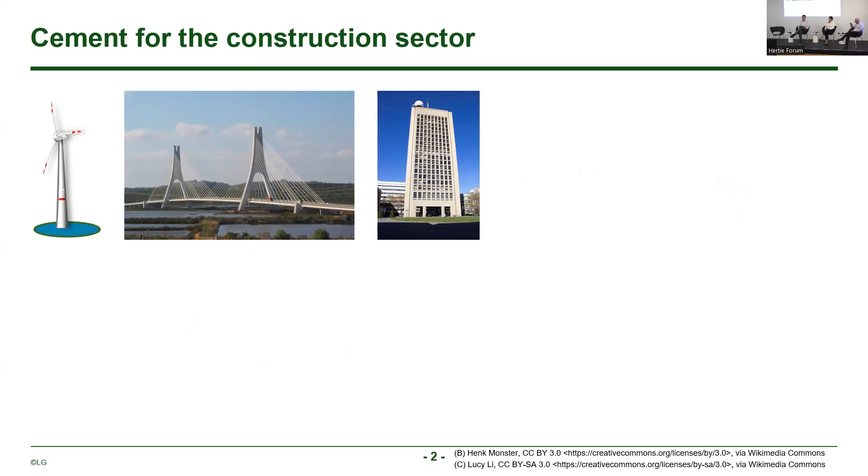So I want to give a brief overview in the topic of cement production and the different scales. All of you know what cement is being used for. Tobias gave a great introduction in the history of Portland cement. We need cement and concrete products for wind turbines, for bridges, for buildings in the future, probably also over the next decades until we achieve net zero emissions by 2045 or 2050 in Europe. And that's quite a short time scale.

It's only 25 years compared to the 200 years of process optimization, of improving cement production facilities to make them more efficient. In a very simplified way, we can say that for Portland cement, we use limestone that is then used to produce clinker. There are lots of chemical reactions going on, high temperature process, 800 to 1000 degrees Celsius. The limestone is decomposed into carbon dioxide, which is the process-related emissions, but then we also have large quantities of carbon dioxide emissions from the fuels.

And then we use clinker, usually 60 to 90% of clinker for different cement products, and cement is not only one product, but there are several dozens of different types of cements with different chemical properties, binder functions, etc. And we'll probably hear more about those different variety of cement products later on. And then we can also use lots of supplementary cementitious materials, so other materials which, for example, blast furnace slag, have similar properties and can be used as a clinker substitute.

If we look at cement demand in Europe today, we are at around 183 million tons demanded and used every year, of which about 77% are provided with clinker.

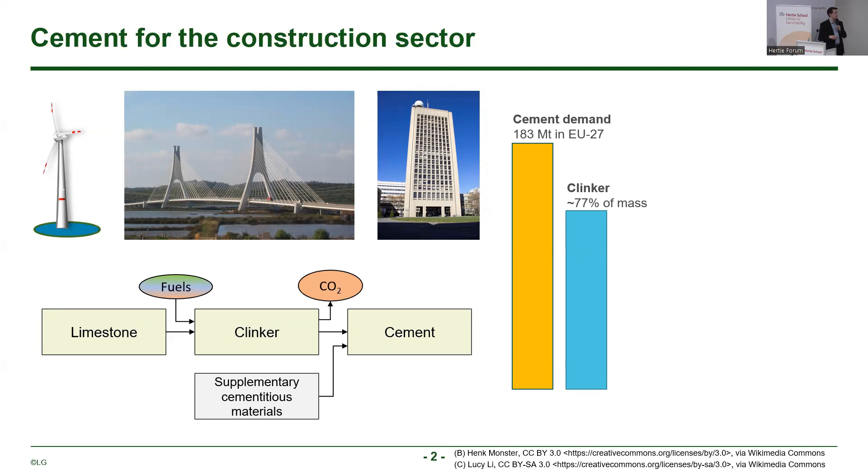If you look at the greenhouse gas emissions from clinker production, we have the process-related carbon dioxide emissions from the chemical reactions, up to 480 kilograms per ton of clinker. And then we have, on top of that, roughly the same amount, about up to 400 kilograms of carbon dioxide per ton of clinker of the fuel-related carbon dioxide emissions.

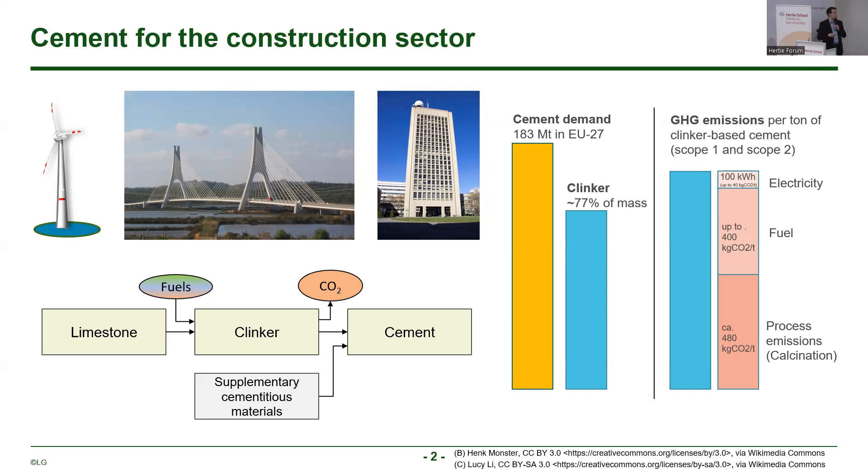Of course, there are large differences across production sites, can be any number between 200 and slightly more than 450 kilograms, depending on the fuel being used, on the process efficiency and the operating efficiency of the cement plant or the clinker plant. And then we have electricity, which is needed for the different grinding processes and for operating the production sites. I want to talk about these opportunities for reducing these emissions, give a brief overview of the production. But let us look at cement production globally.

200 years ago, there were probably only a few kilograms of Portland cement being produced every day. Then it increased to tons. If we look over the past decades of cement production, over the past 30 years since 1990, cement production has more than tripled. It's a similar order of magnitude as other bulk materials like steel and aluminium.

Production has now stabilized at around 4,200 million tons every year. But given the increasing demand for infrastructure in countries all over the world, demand is expected to be as high as it was previously. This is really a striking and important number to keep in mind, that the production volumes are really of large quantity.

If you look at global in-use stocks today, that's part of an analysis we did last year and published, so you can also read the details of the analysis and the approach. We looked at different cement in-use stocks in different countries using the World Bank country classification of high, upper middle, lower middle, and low income countries. We have one representative example from each group.

We see that the in-use stocks in terms of cement in-use stock per capita can range between 10 and more than 30 tons per capita in high-income countries, and can be as low as 1 to 7 tons per capita for lower-income countries. As we see countries building infrastructure, roads, wind turbines, and all other forms and buildings that need concrete and cement, we probably expect an increase in the production.

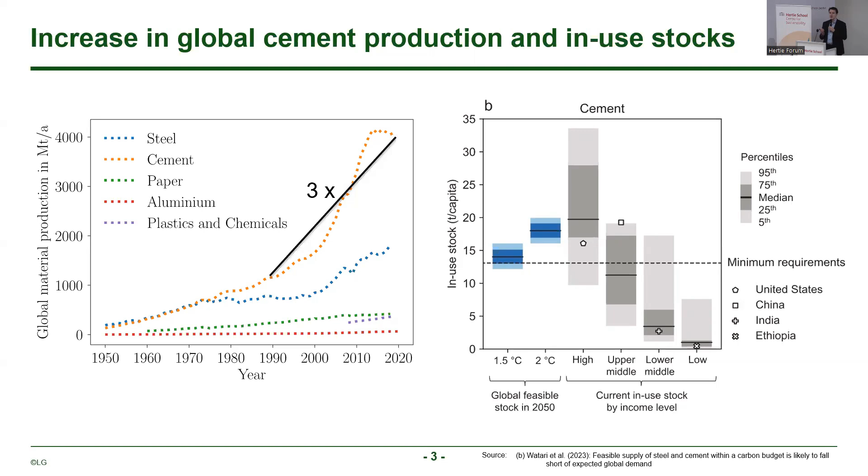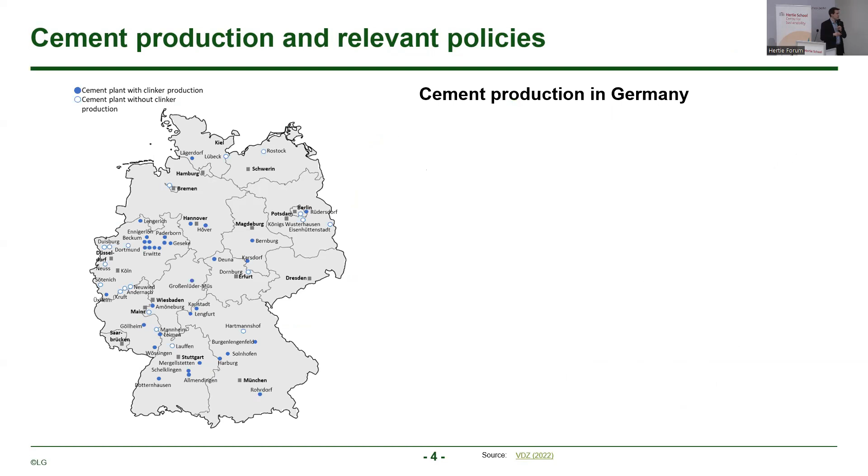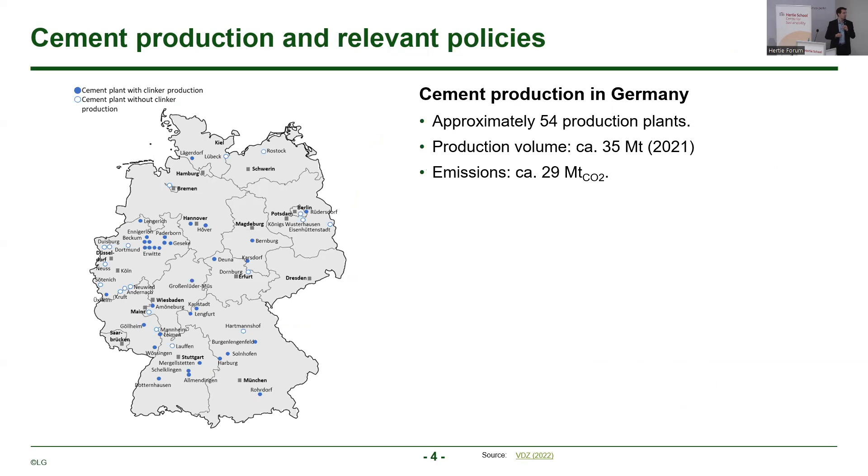If we look at cement production in Germany, this is a map, and there are lots of statistics available from the VDZ. We have approximately 54 different production plants, some integrated production sites with clinker production, but then also cement grinding facilities. The production volume is around 35 million tons. If you compare those 35 to the 4,200, you see it's quite a significant delta. The emissions are around 29 million tons of carbon dioxide emissions every year.

There are many different policies that are currently being discussed at local, federal, European level. We heard some examples of the carbon contracts for difference earlier on today. There are also examples of hydrogen use in cement production, but there are also other international trade mechanisms like the carbon border adjustment mechanism, then the national carbon management strategy, which highlights or classifies cement and waste incineration as some of the hard-to-abate production processes.

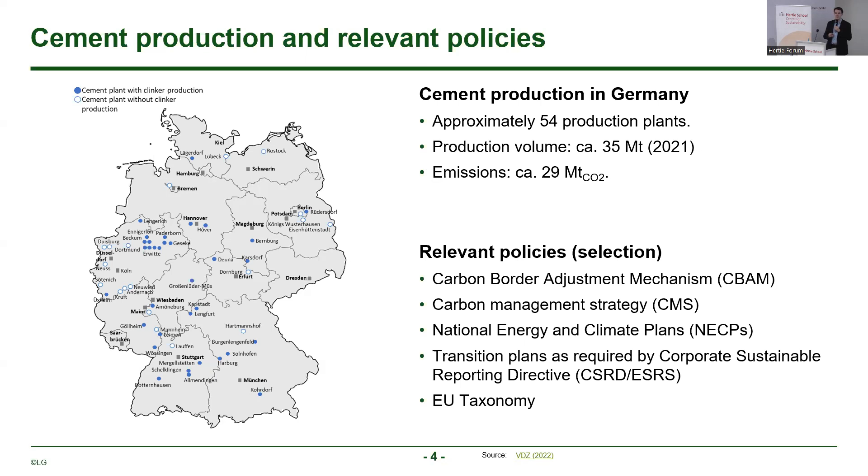I'm sure that's something we can discuss later on as well. Then there are the national energy and climate plans, which outline the national strategies to achieve the different European emission targets over the next decades, which also only include a few words and paragraphs on industrial processes and cement production. And then there's, of course, the different reporting requirements as part of the European Corporate Sustainability Reporting Directive and the European EU taxonomy, which provides a financial framework for classifying investments into cement facilities as environmentally sustainable.

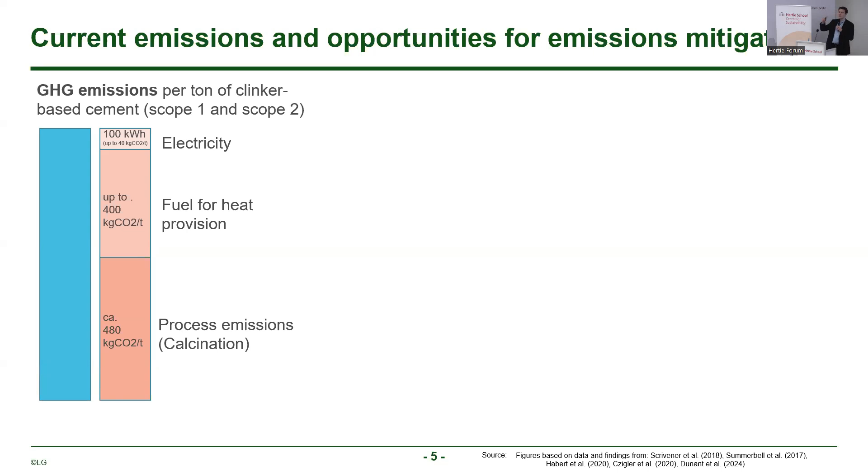If you look at the emissions figure again, we have the greenhouse gas emissions per ton of clinker-based cement, roughly in that order of magnitude. So it's around 1 ton of carbon dioxide emissions per ton of cement today, and we want to get this to net zero within the next 20 years.

For electricity, we know we can use renewable electricity, and by multiplying the 100 kilowatt hours needed per ton of clinker-based cement with a quantity of cement, we end up at around 16 to 20 terawatt hours of renewable electricity to provide green cement for Germany, which is an order of magnitude of Croatia's electricity demand.

We can use biomass and carbon capture and storage to mitigate the emissions from process or fuel-related emissions, and use CCS for the process-related emissions. The key challenge here, however, is to provide the infrastructure needed for carbon capture and storage, and to have sufficient amounts of renewable and sustainable biomass. This is a really big challenge.

There are also other options that are being discussed and have been discussed for the past 20 years or so. There's a really interesting IEA technology roadmap from 2010, which already outlines the different strategies ranging from energy efficiency, so optimizing the combustion processes and thermal insulation and other measures, reducing the clinker factor, so replacing clinker with fly ash, blast furnace slag, or other materials with similar properties.

But there are also novel innovations, and that's what we want to focus on in today's discussion, that might lead to zero emission cement. One recent innovation was recently published in a Nature paper by Cyrille Dunant and his colleagues, about cement recycling - recycling cement as a real industrial symbiosis together with steel electric arc furnace recycling.

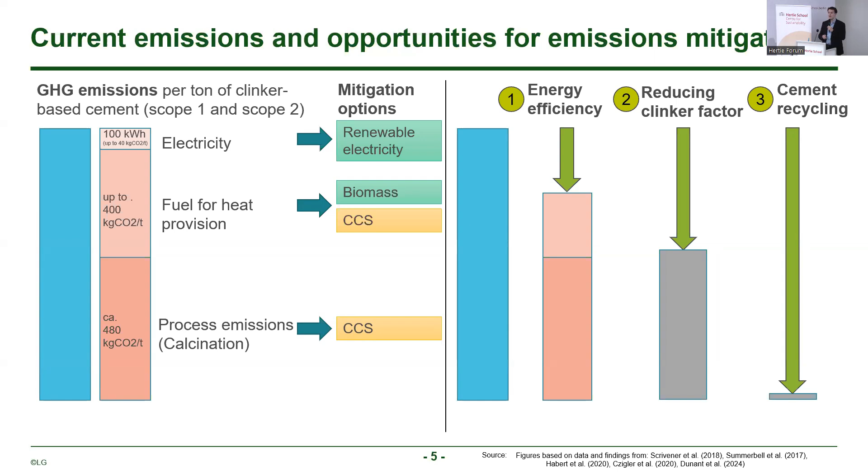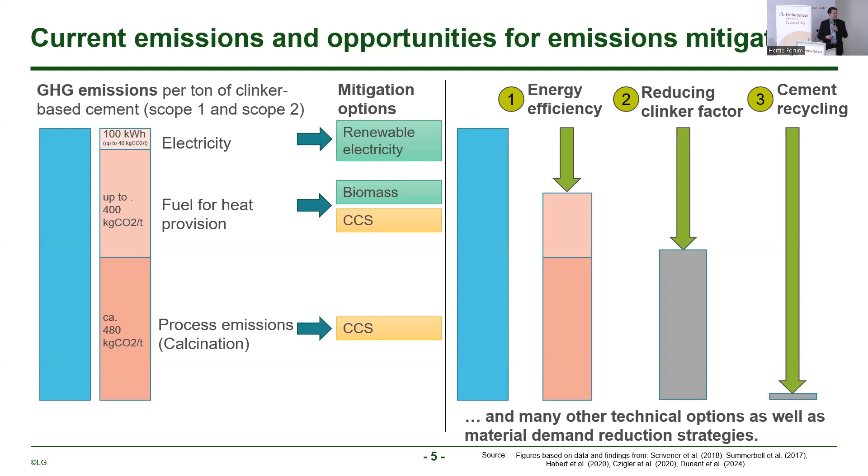Which is an electricity-based process. Of course, there are many other options for reducing the specific process-related emissions, using chemical reactions and processes as part of a carbon capture and utilization reaction to permanently or temporarily store the carbon dioxide emissions. All of these innovations might help contribute to that new mix of low carbon and sustainable cement solutions.

I want to point out one real challenge, one aspect I want to bring to this discussion, about the carbon capture and transport infrastructure. As part of an analysis, we looked at the carbon capture and storage deployment and the expected deployment in the different IEA technology roadmaps over the past decades.

We mapped the projected carbon capture for the year 2021 from the different IEA technology roadmaps, from 2010 up to the most recent one. As you see, it follows some sort of hockey stick, but unfortunately not in the direction we want to see, because infrastructure deployment for CCS has really been far below expectations.

This is due to multiple reasons. The economics of carbon capture and storage did not work out. There were social protests, concerns and objections against carbon capture, et cetera. In the end, we ended up with a current capacity for both combined steel and cement production of only 1 megaton of carbon dioxide, which is significantly lower than the several gigatons those processes emit currently.

So the key challenge now in the future is to accelerate this. There are two key observations. One is that the deployment of CCS or CCUS has been slower than expected, and that in order to meet the 2050 targets - around 2,000 megatons or 2 gigatons, roughly half of the emissions in those two sectors - by CCS, we need a significantly exponential deployment increase in those technologies.

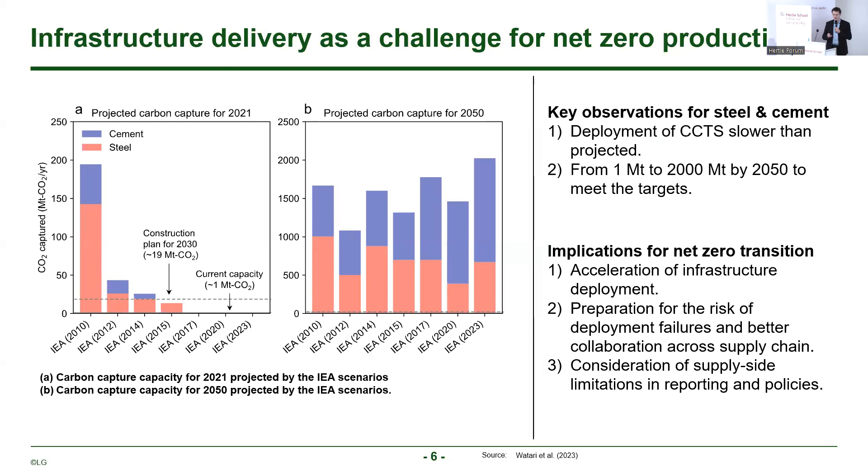What happens if there's limited supply of renewable electricity or biomass? And what are the mitigation strategies at a corporate level, but also on a national level, to address this potential risk? So to sum up, there are 5 points and 5 key takeaways that I want to summarize.

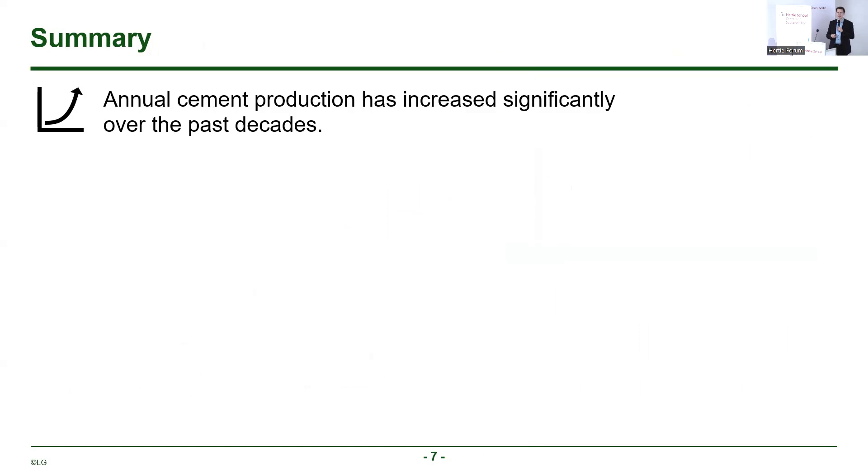First, annual cement production has increased significantly over the past decades, and we need to really find solutions to achieve net zero in cement production quite quickly, on a quite short time scale. Emissions from cement production will likely exceed, with current trends, if we don't find appropriate mitigation strategies, the 1.5 or 2 degree carbon budgets.

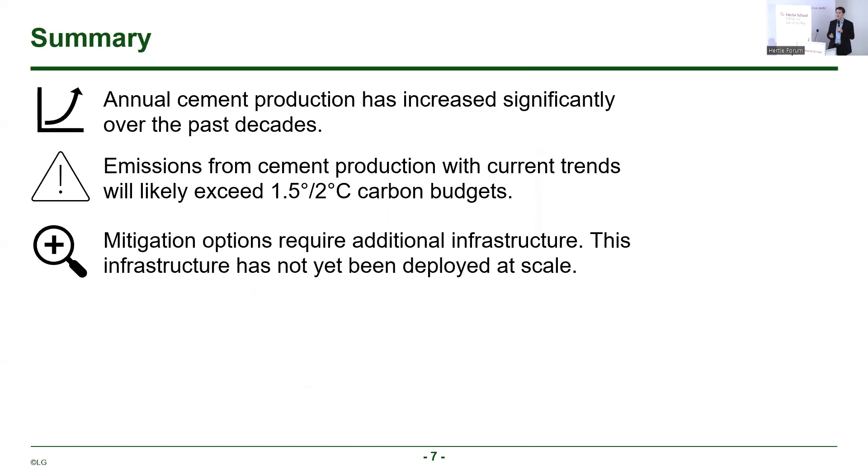Mitigation options require additional infrastructure, and this infrastructure has not yet been deployed at scale. There are, of course, pilot plants and trials available, and that's why I'm optimistic that we might achieve the challenge of net zero cement by 2050, but it's a tough challenge.

The fourth point is that significant efforts are needed to increase the supply of zero emission resources - renewables, electricity, biomass, and other mitigation options. And the final point is that there are innovations that exist to reduce emissions with efficiency increases, novel production routes, and novel processes that we might not know about today, but that might come into the market over the next five years or so. Thank you very much, and I look forward to the discussion and especially your questions.

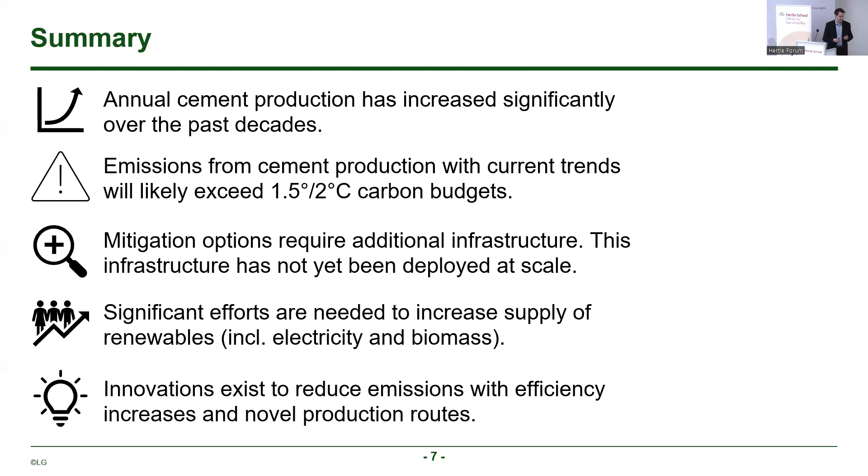How are we going to do this? So we're supposed to react. And let me start with a few reactions, or actually more questions towards you.

I thought this was a really good introduction, a good overview on what we're trying to achieve here. You lined out a lot of areas where we need more attention, more policy push, innovation push, and so forth. Specifically, if you look at the next 2, 3, 5 years ahead, or think of a legislative cycle at the European Union, what do you think would be the immediate next steps we need to take to advance on those?

Well, that's a tough question, because there are so many various levers that you can pull.

From the demand side, there are different options for changing public procurement practices to ask for higher shares of low carbon cement products, so low clinker based cement, and those technologies already exist today. If you go to any cement producer and ask specifically for more sustainable or low carbon cement alternatives, they might offer them. Of course, there is a certain cost premium, and if this sustainability premium is reflected in the design of those procurement mechanisms, I think this would create immediate market pull for more sustainable, or at least slightly lower carbon, cement products. Of course, they're still far away from net zero cement.

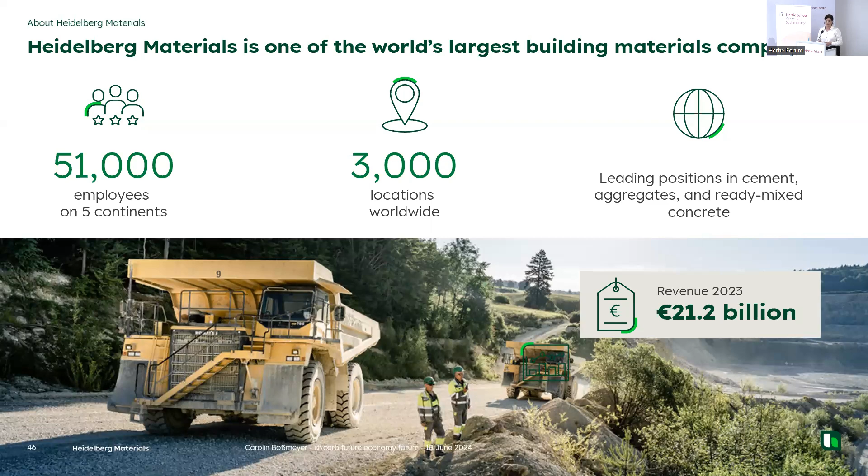As was mentioned before, concrete is indeed indispensable for fulfilling the construction tasks of the future. It is the second most used material in the world after water, because of its good properties and range of applications. It comes with a number of advantages — it's extremely versatile, locally produced and sold, recyclable 100%, durable, sound absorbent, etc.

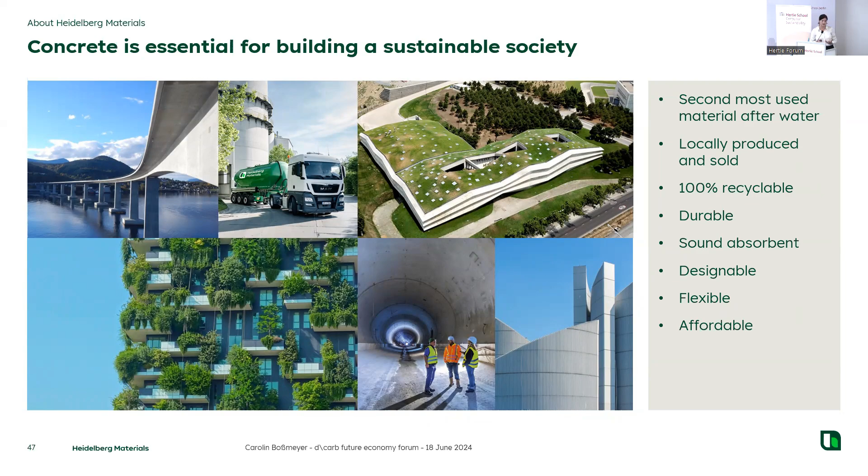This is why you can do great things with concrete. Look at this architecture, for example, or this one — this is the Mose project structure that prevents Venice from flooding, or a 3D printed house, as you can see in this picture.

But as you know, and this is why we are sitting here, this all comes with a very heavy energy and CO2 backpack, and we have to find solutions for it, especially as we know we will continue to need huge volumes of concrete and cement in the future as well.

Originally I wanted to have a small stop-over here, because my experience is that very often cement and concrete are mixed up — Lucas explained it a bit. It's important to understand some of the basics, because only then can you understand where the levers lie for climate-friendly cement production. What's important is to see that the CO2-intensive part of the production is the cement clinker production, and then the content of that CO2-intensive product in cement and then in concrete.

As a raw material, you have limestone or clay, or a mixture of them like marls, and they're needed as a source for calcium carbonate. You need that for the binding function of the material. And then you need very high temperatures to produce an intermediate product out of that, which is cement clinker.

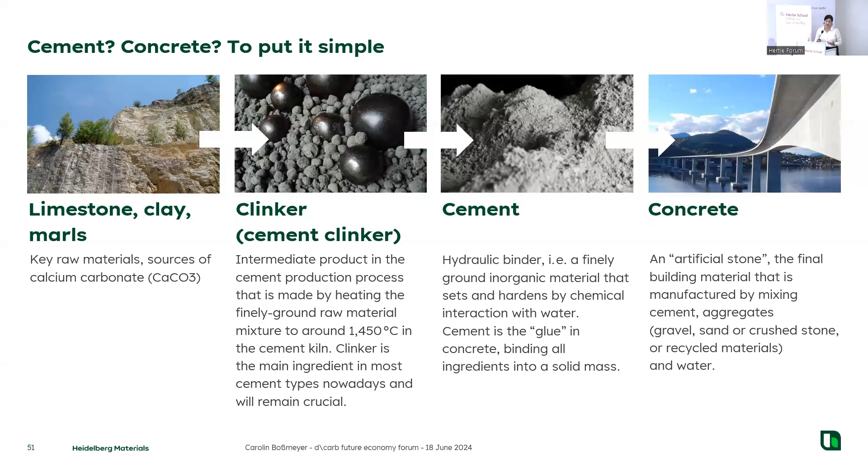This is what Lucas also mentioned. I will repeat it because it's important to understand there are two sources of CO2 emissions from clinker manufacturing that need to be tackled with a range of measures and technologies. The majority comes from the so-called calcination of the limestone. You can see the chemical equation on the left, and this is unavoidable CO2 from the process. It accounts for two-thirds of the CO2 emissions, and the rest, as you mentioned, Lucas, is fuel-related emissions that can be addressed by a fuel switch. So if you manage to run the process with renewables, carbon-neutral fuels, or electricity, this side of the problem is solved.

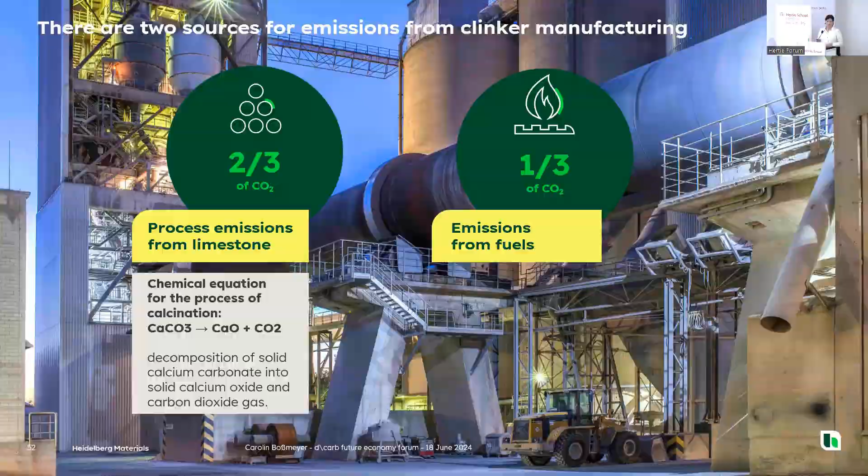We have, as a company, the most ambitious CO2 target for 2030 for the direct emissions from cement production, the so-called Scope 1 emissions in the sector, and we are striving for a reduction of about 47% compared to 1990 by 2030. We want to achieve this by a mix of measures. You can see the corresponding 2030 targets on the right-hand side. At the clinker level, we need more alternative fuels and biomass to replace fossil fuels like coal and oil. And the second lever, which is very powerful, is reducing the amount of clinker in cement, the so-called clinker to cement ratio.

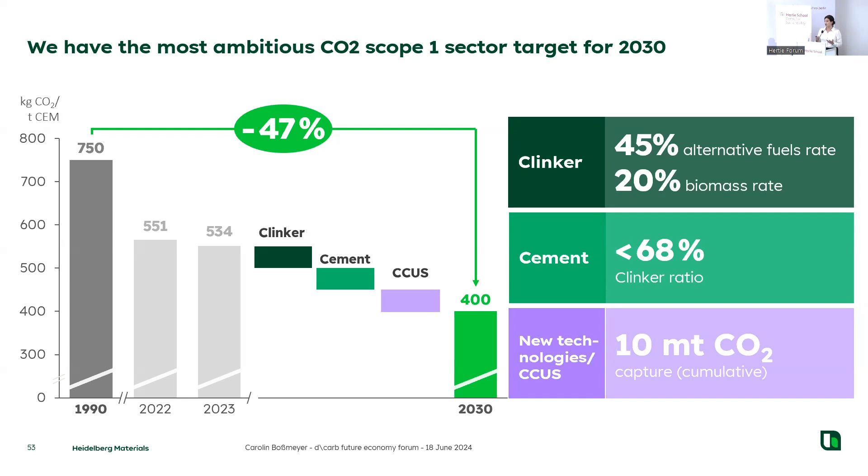Please keep in mind, you can see a number there, 68%. We want to get there by 2030. This is a global target across all countries, installations, and markets of a huge company. And of course, single types of cement can have a significantly lower clinker factor. The third lever is that we are also now introducing, as a front runner in that field, carbon capture and storage or carbon capture technologies. We will have implemented first projects by 2030.

We also have targets, you need targets as a company, that's the driving force, for all three scopes according to the greenhouse gas protocol. These targets have also been validated by the Science Based Targets Initiative, so they are aligned with the 1.5-degree framework of the SBTi. Given that, it's our ambition and our goal, and what we promise to our investors and the market, that we want to achieve net zero in line with the SBTi by 2050 at the latest.

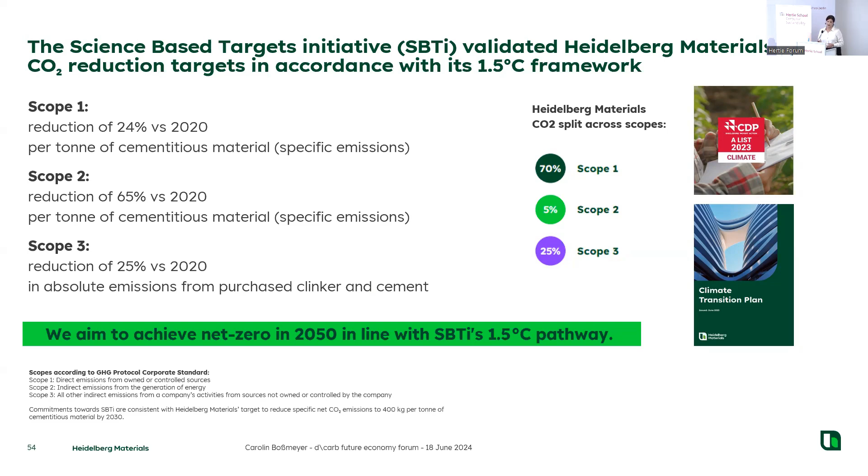So avoidance of CO2, that's an important message, has priority. That also makes sense, not only from an environmental or climate point of view, but also from a business perspective. This is why we are constantly working on low carbon products. And what does that mean now in terms of levers and measures?

The first point is energy. I mentioned that before. We are maximizing the proportion of waste-based alternative fuels, including biomass, to replace fossil fuels. It means improving processes and investing in plant efficiency, increasing renewable energy and waste heat recovery. We're also working on, as was mentioned in the previous panel as well, electrification of our processes, exploring the potential of electrifying the calcination or the whole process, and also exploring the use of hydrogen. But this is not state of the art in cement production nowadays.

Then the important thing of the clinker to cement ratio, so reducing the proportion of clinker in cement, and also of cement in concrete. To this end, we are developing cements and cementitious materials containing less clinker, also alternative binders to Portland cement, and concretes with a lower cement content.

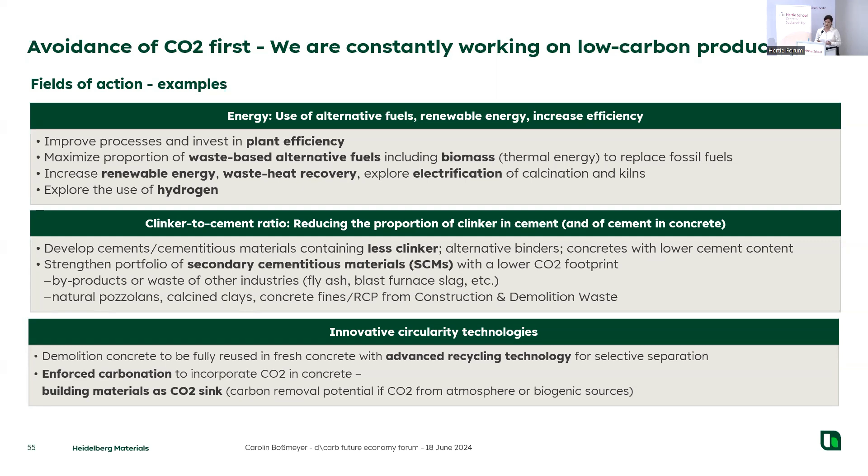So this was an abstract description of some of the important levers to decarbonize cement, but they have to be put into practice, and that needs to be done project by project and day by day and side by side. And walking the talk means really investing in manifold activities. I've picked out some here - I won't read them out now, but we can leave them for this discussion later on.

It's about investments in countries, for example, in grinding facilities, so that you can deal with a variety of material that we now want to use. It's about huge R&D projects - we have a huge global R&D team really looking into all the technologies that are available on the markets and checking them. And it's also about acquisitions of companies to get access to material that can replace ordinary Portland cement.

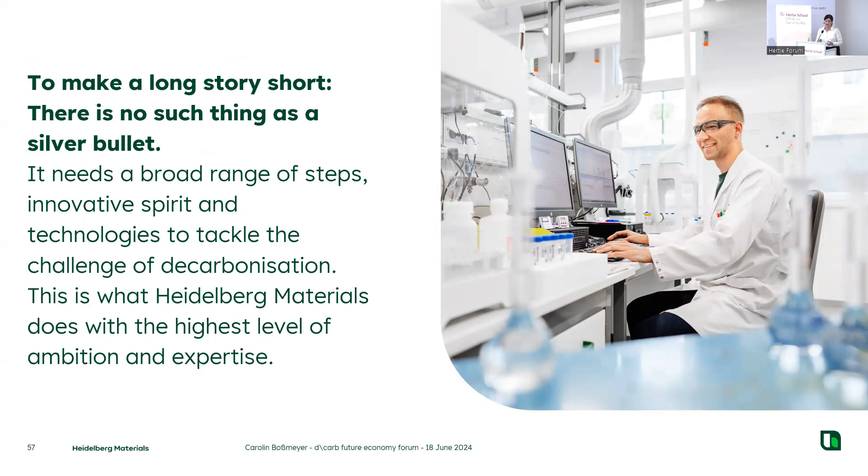To make a long story short, there is no such thing as a silver bullet. So we need to tackle a broad range of steps, innovate. We need innovative spirit and technologies, and that is what we are doing as a company. It means pursuing a clear goal while dealing with a lot of uncertainties as well and path dependencies. And what I would really like to stress is that scalability is key. We need to pull many levers on the one hand, but also identify scalable solutions that go beyond niche applications and that can really make a difference.

For example - where's that one now? I had some here. Sorry for that. That means I'm repeating a little bit what it means in terms of scalability. We need access to the alternative raw materials, so sufficient availability is really maybe a bottleneck, and it is crucial to substitute the materials.

It's also about things like building codes and standards, product standards in the company. They need to be adapted and further developed to gain flexibility and speed up implementation. Things can't stay as they are. We need to be dynamic everywhere in society and also in policy making.

And the customers, they also need to be convinced. We need market acceptance. We need the public sector to support this through public procurement. And we have to take into consideration that we need various solutions due to the differences from country to country.

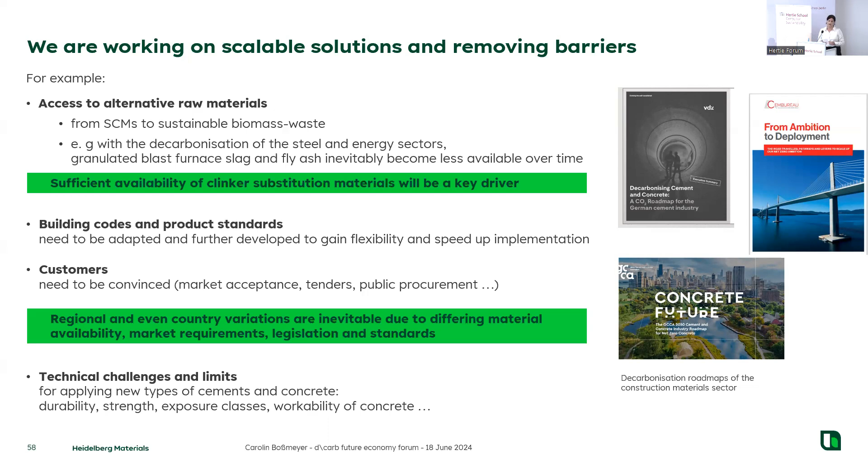So the technological ambitions and measures, as well as the targets in the area of climate protection and circular economy, are also reflected in our product strategy. It is that simple - we have to earn money. And in the end, what matters is that we need to accelerate the market ramp up for these low carbon and circular products. It's a step-by-step path with intermediate goals.

In January this year, we decided to launch a new global brand to push for that - a brand for low carbon and circular products, to bring them to market, offer them to customers, and harmonize the sustainability product portfolio globally. This is called EvoBuild, and the products are either low carbon cement and concrete, or circular, or feature a combination of both. We have clear criteria that have to be met to qualify as an EvoBuild product. The other cement companies in the world have this kind of product strategy as well, of course - that's not something only we are doing. Our commitment as Heidelberg Materials is to generate half of our revenue from these products by 2030.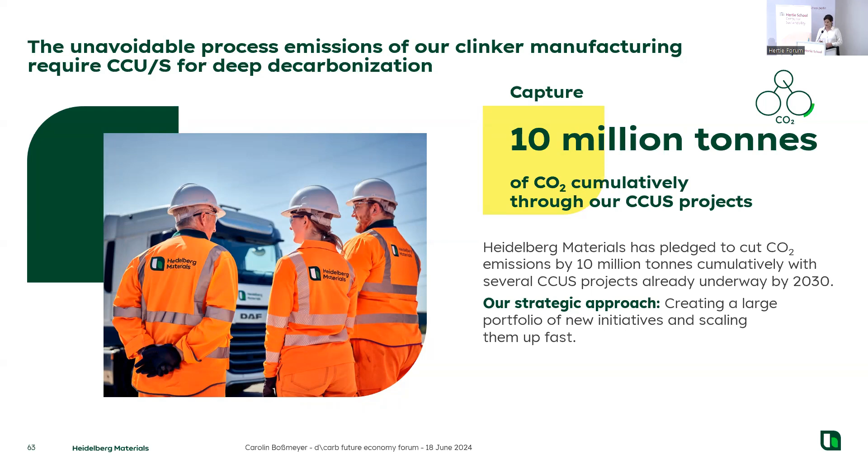We have an outstanding lighthouse project gaining attention around the world, happening in Brevik in Norway. Here we are implementing the first industrial scale carbon capture and storage project at a cement plant, and mechanical completion is scheduled for end of this year. It's designed to capture half of the plant's CO2 emissions - that is 400,000 tons annually.

This was visited last year in January by our German Vice Chancellor and Minister for the Economy and Climate Action, Robert Habeck, with a very huge delegation from Germany. That was really a decisive step towards preparing the carbon management strategy for Germany, and also to take responsibility as the largest industrial player in Europe and the third largest industrial nation in the world.

In addition, just as a side note, in addition to our EvoBuild brand, we have also launched another new brand called EvoZero, which was developed specifically for Heidelberg Materials' future CCS-based net zero products. The first EvoZero product achieves its net zero attribute through the application of CCS technology in Brevik.

So these technologies and the implementation of projects are very demanding. It's real pioneering work, but we have to start - we just have to start and do it. And we are starting in Europe and North America, as you can see here. That's our project portfolio.

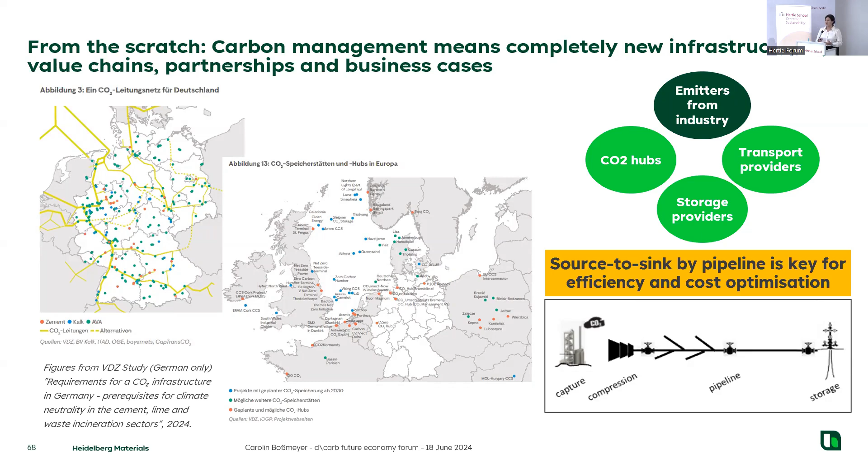Pipelines will be crucial, and source to sink by pipeline is key for efficiency and cost optimisation. Of course, other transport modes will also contribute, like ship and rail. So all players in the value chain must work together, and in the end it will be our task.

We have to decarbonize all the remaining clinker plants that we have. So we all have to move in parallel, and it will only work with a clear political commitment. This is why we appreciate that things are really getting moved now, like the carbon management strategy in Germany, the carbon management strategy at the EU level, and also the Net Zero Industry Act targeting the manufacturing of clean technologies in Europe. So policy making is really now in a decisive phase for setting the course, and this is what is needed.

My last slide: what is needed from politics is really that we get strategies and a clear path forward, including CCS and CCU, and that we manage to get the legislative framework for capturing, transport, and storage set up. It's not done yet in Germany, it's just now being negotiated in parliament, but it has been adopted by the cabinet, to put it simply. We need push instruments like effective funding programs, including CCFDs. We learned more about this in the morning. We need pull instruments too—they're equally important, like a green lead market, to unleash demand for these products.

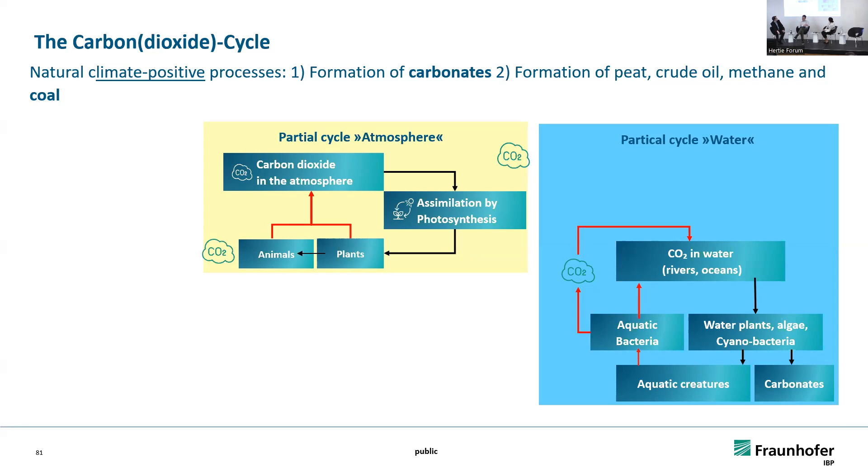Plants assimilate CO2 by photosynthesis, animals eat plants, and so on - this is a cycle in itself. You also have a water cycle, which is quite similar. Here's the important thing: we also have water plants, algae, and bacteria which can produce carbonates, creating a real carbon sink in the ocean.

At least we have a third cycle, the land cycle, where dead organic material can be converted into peat, coal, crude oil, or methane - another carbon sink in nature. All these cycles are combined with each other.

Then humans came and had the idea to use these carbon sinks as fossil fuels, and this is one reason why we release CO2 into the atmosphere. Also, the cement industry needs carbonates for cement production. These are the two processes which increase the CO2 content in the atmosphere.

So why not try to reverse these arrows? Maybe it's possible to create or build carbonates, or even generate coal. These would be two climate-positive processes which would reduce the CO2 amount in the carbon cycle. We always have to look at a cycle, not just one single step.

I'd like to ask a question: how many tons of CO2 do you have to remove from the atmosphere to effectively remove 1 ton of CO2? Sounds silly, but you actually have to remove double the amount - 2 tons of CO2 to effectively remove 1 ton - because the atmosphere is connected with the water cycle. If you remove 1 ton of CO2 from the atmosphere, half that amount will be released from the water back to the atmosphere. This makes things even more complicated.

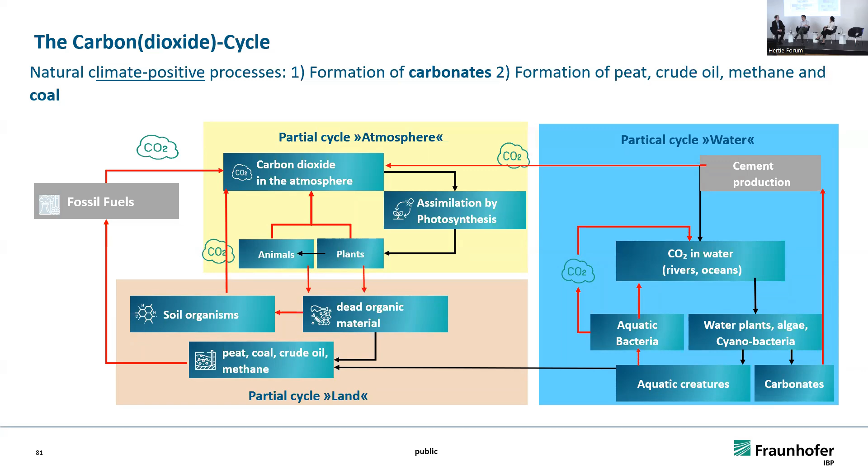But let's go to the first idea: is it possible to generate biological building materials? Yes, it is. There's a big project running, called Biomason, funded by NASA, which has spent an unbelievable $50 million to investigate whether it's possible to generate building products on the Moon or on Mars, because it's economically not viable to transport concrete from Earth to Mars.

The idea is to mix sand, available on the Moon or Mars, together with human urine - a little bit ugly - and add some algae. Then they start their metabolism and create calcium carbonate. You see a few products here, a so-called regolith stone. Of course, the production isn't highly productive yet, but it's a first step.

We now have a project together with our colleagues from Fraunhofer FEP, where we try to use alternative materials, for example waste concrete, as a starting material. The metabolism of these cyanobacteria is very slow - they're one of the oldest living organisms on planet Earth, here for 3.7 billion years.

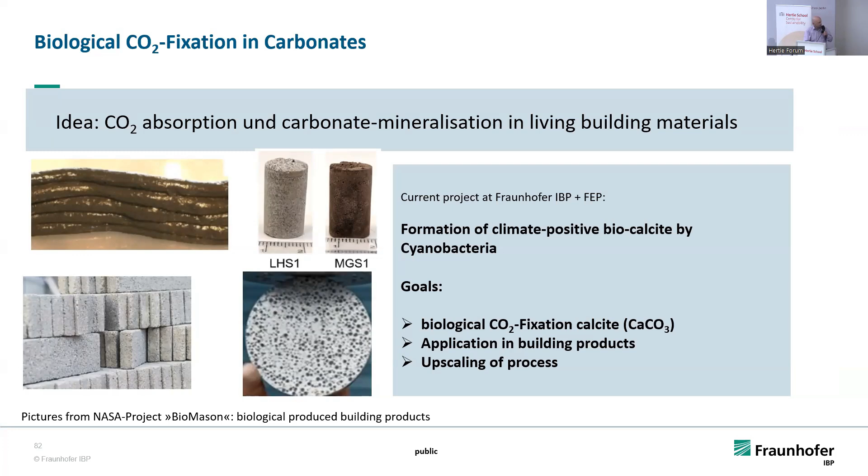But there's an alternative: the so-called electrodynamic fragmentation technique. We put the concrete underwater between two electrodes and apply a high electrical field in the range of 200,000 volts. Immediately, what we call streamers, some lightning discharges, run through your composite material along phase boundaries. This leads to a mechanical weakening of your product. And the first lightning strike, which reaches the counter electrode, generates a plasma channel.

This spreads very rapidly. It generates a pressure of up to 10 gigapascal, which is in the range of a TNT explosion, and then you can tear apart the concrete. This is the only technique which only has to overcome the tensile strength and not the compressive strength.

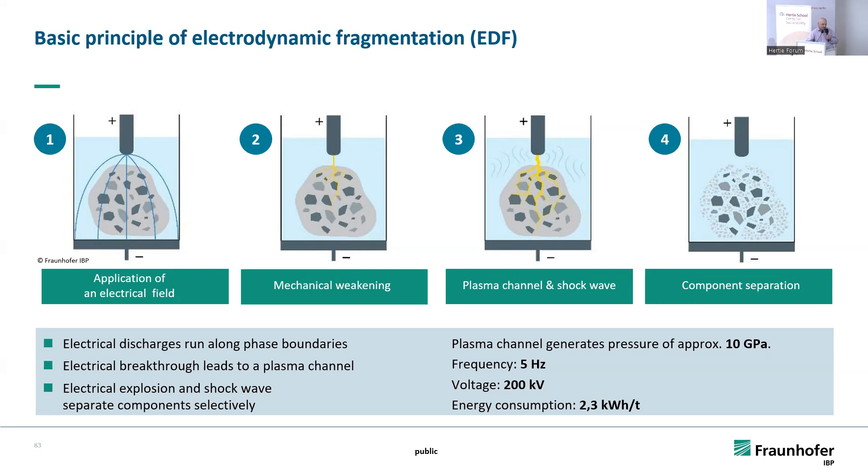And the good news is we are obtaining 3 different fractions. We obtain a coarse fraction bigger than 4 millimeters, which is now completely free of cement stone, and this has the same quality as the original aggregate. Another fraction is a mixing of sand and carbonated cement stone, and most interestingly for us is the filter cake, because this contains secondary calcite and amorphous silicates.

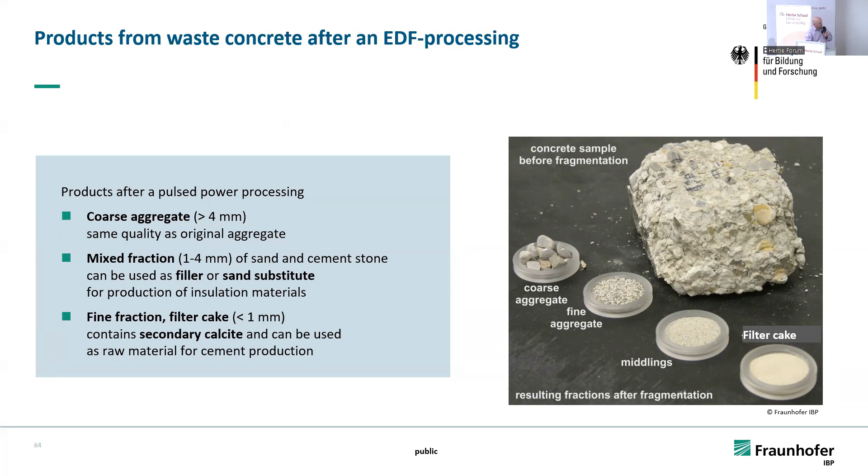The effect is that the lightning strike releases calcium ions into the process water. The water becomes highly alkaline, and this absorbs CO2 from the atmosphere like a vacuum cleaner. So in every case, the cement stone was completely carbonated afterwards. Now we can use this filter cake, which you see here on the right-hand side. We have to adapt it a little bit by chemical means, and then we can really produce an ordinary Portland cement out of these filter cake fractions.

And if the whole cement industry in Germany would use secondary calcite or biological calcite for cement production, we could theoretically reduce two-thirds of the CO2 emissions.

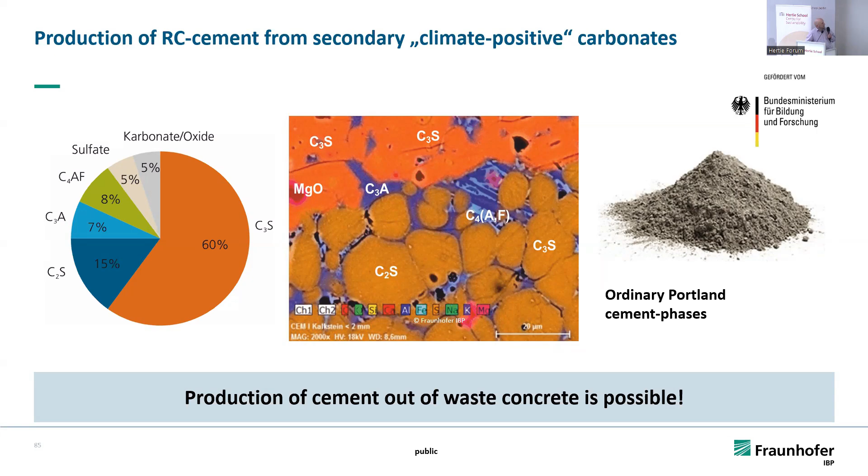At the moment we are upscaling this technology, and it's still a long step. These slides are already unbelievably 25 years old. But in the last 4 or 5 years, we have found an industry partner who can build generators, which makes it now economically viable. So now we are in the range of an energy consumption of 2.3 kilowatt hours per ton, and we now try to upscale it to about 10 tons per hour. So it is possible to recycle concrete really 100% with this technique, and we have had many projects with this technology.

Coming to a material Lucas and Carolin mentioned, cement is mixed with so-called supplementary cementitious materials. In Germany, we usually use fly ash or blast furnace slag. But the problem is in 2030, when the coal power plants will shut down, we will have a lack of fly ash, missing 2 million tons. And when the steel industry changes to hydrogen technology, we'll also have a lack of about 8 million tons of blast furnace slag. If the cement industry wants to reduce the clinker content down to 50%, we need about 16 million tons of supplementary cementitious materials in Germany in about 6 years from now. So it's a big challenge.

The only material which can fill this gap is clay. Clays are always available worldwide. So the whole cement industry would need about 400 million tons of clay annually to fill this gap.

Here's one example of a clinker-reduced cement, a so-called LC3 formulation. This stands for limestone, calcined clay, and it's a 3-component system. It's a formulation which contains only 50% cement clinker, 30% of this calcined clay, and 15% limestone. This gives you a concrete with the same properties as if it were made from 100% cement.

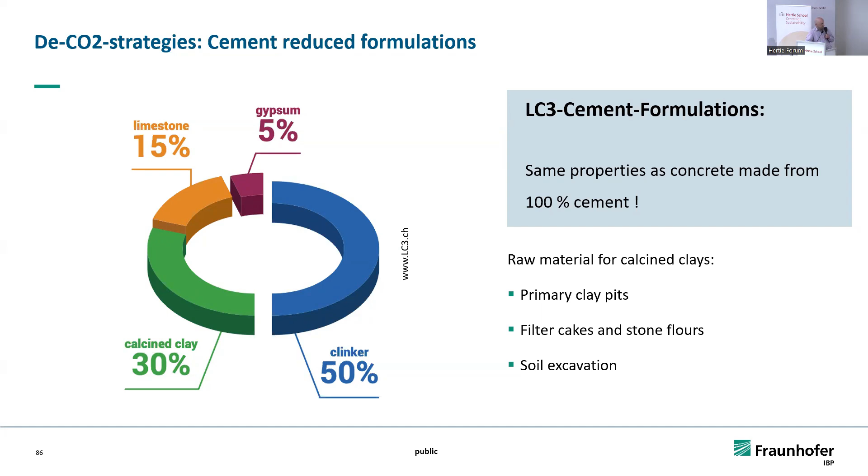Coming to the other idea, the formation of biological calcite, it's more or less a carbon capture strategy. Now I want to present a technology which avoids the generation of CO2. This is called pyrolysis, a method which produces pyrochar or carbonizates.

If you have organic waste like biomass, car tires, methane, plastics and so on, and you apply combustion, you convert every carbon atom into a CO2 molecule. If you use a pyrolysis technology which works without oxygen, you get other products: a so-called biogas or synthesis gas containing hydrogen and carbon monoxide, and depending on the raw material, a highly valuable oil.

The mineralic waste is combined with the carbonizate, and these products you can reuse again. For example, if you use biomass, after pyrolysis you can remove about 40% of the carbon as a carbonizate and avoid the generation of CO2. So this is clearly a climate positive technology.

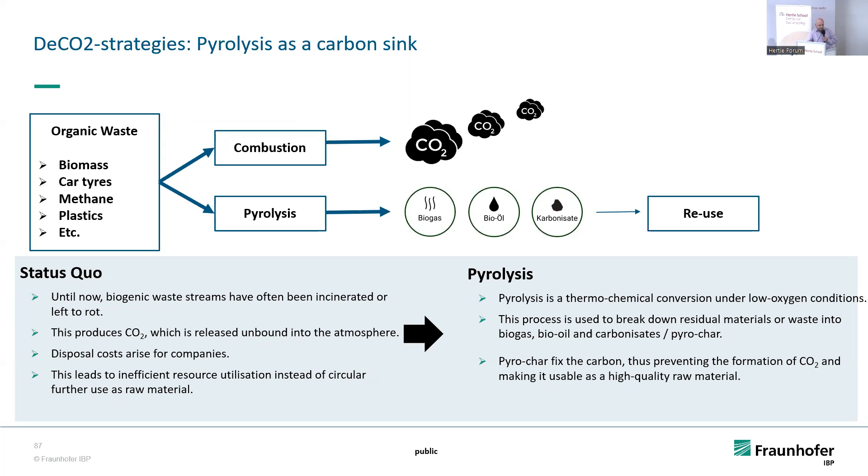Now the big idea is to use this pyrochar or these carbonizates in building materials, which you see here. These were our first trials with mortar, and on the right-hand side we used concrete and added pyrochar to it. Take these numbers: one part of pyrochar reduces three parts of CO2 in your building material.

The first idea was to use this pyrochar just as an additive, and there were some challenges. You can't just throw pyrochar into concrete, it will swim at the surface. But we have some tricks, and we now have a patent to modify this pyrochar so it can be mixed together with concrete. But we wanted to go a step further.

We found a method to granulate this pyrochar, so now we can get a particle size distribution. Here you see the approach: we replace the sand fraction smaller than 2 millimeters with this granulated pyrochar, and it still works. The concrete has the same mechanical properties. We were also surprised that it's lighter than normal concrete, because if you replace gravel and quartz with pyrochar, it's much lighter. And I think it's even much prettier than normal concrete.

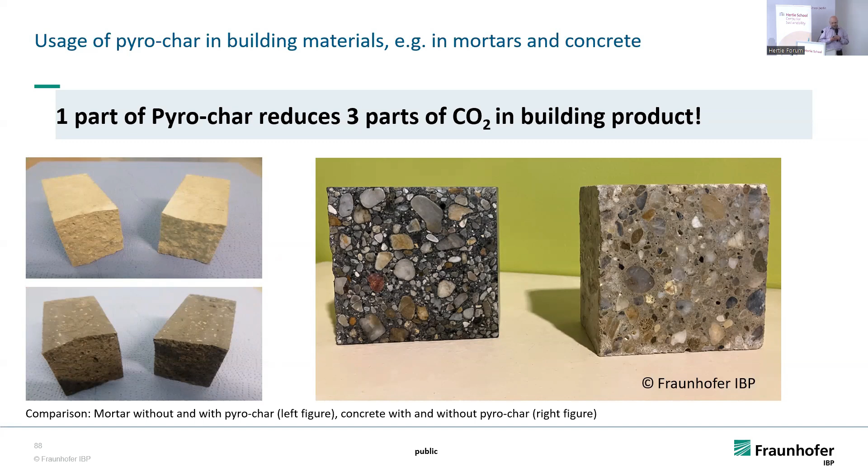So, yes, we're still not at the end of the road here. I think there are still some open questions. Maybe in future we can even replace big gravel with these pyrochar granulates.

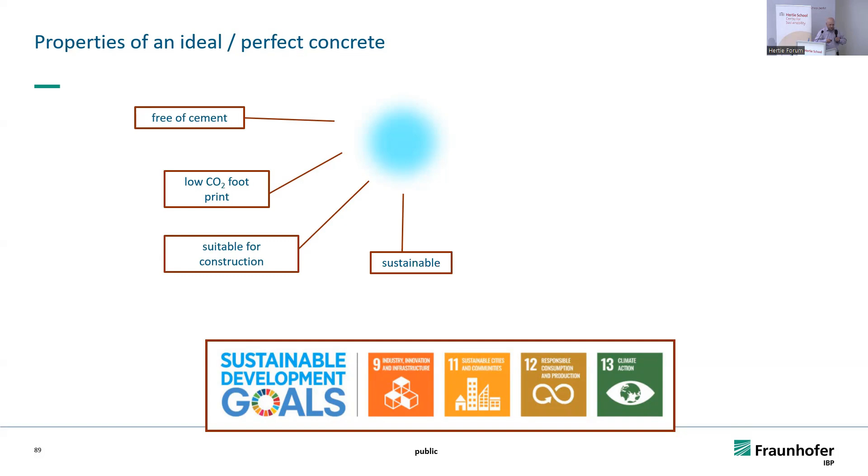On my last slide, I want to go back many thousand years. Let's ask the question: which properties should a perfect concrete possess? Ideally, it should contain no cement at all, then it would have a low CO2 footprint. It should be suitable for construction, sustainable, using locally available resources, recyclable, durable, and a nice add-on would even be earthquake resilient properties. Now you would say this is many wishes at once, such a concrete isn't possible. The answer is: it was possible.

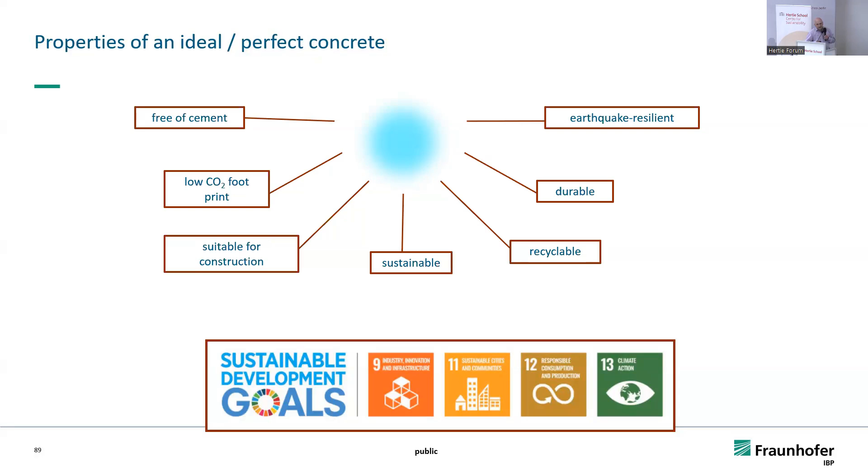Here you see the Pantheon from Rome. This is a concrete dome, built in the 2nd century after Christ. So it's almost 2,000 years old, and it survived 7 earthquakes without any crack. The problem is we still don't know exactly what the Romans did at that time, but we have another project together with the Max Planck Society to solve this riddle. I think we are on a good way. We don't know yet which cement system the Romans used, but in 2 years from now I think I can show you the answer to this question.

And therefore, thank you for your attention.